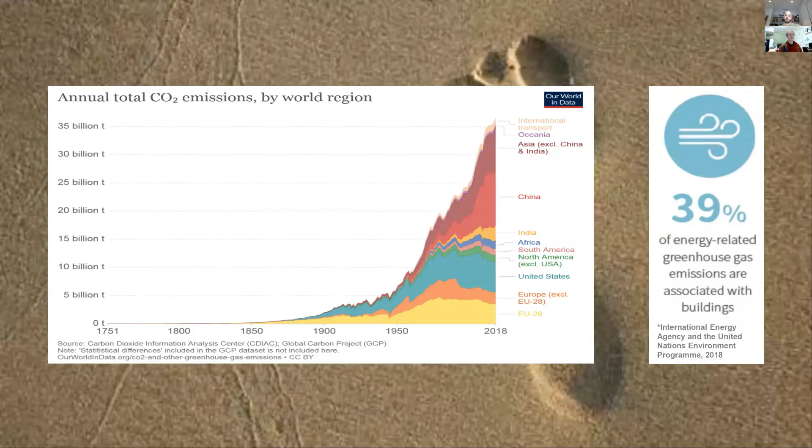Now, each industry needs to create a roadmap to get to a net zero industry. And the building industry actually already has that roadmap ready to go. It's called the Trajectory for Low Energy Buildings. And this tackles operational energy use.

It actually came out in 2019 when the then heads of state under COAG got together and signed it off. And it sort of slipped in a little bit under the radar because it's quite an ambitious document. I know people pushing at the time, they were pushing really hard, but for the wider industry, not all that many people know about this document. It's worth a read. It's only short, but if you read it, you will understand completely why we've got the proposals that we've got into the NCC.

So if we look at the trajectory itself, it actually gives a timeline for the next, well, up to 2028. And it has a number of iterations along that timeline of what's going to happen. But I don't want to go through each one of these things, I'll just go through the very last one. Let me move my thing so I can read my screen.

This shows you where we're heading. We're heading to zero energy and carbon ready buildings. That's residential, commercial, and existing as well is covered under the trajectory. And a zero, I'll read out what it is.

A zero energy and carbon ready building has an energy efficient thermal shell and appliances and has sufficiently low energy use and has the relevant setup so that it's ready to achieve net zero energy and carbon usage if combined with renewable or decarbonised energy systems on-site or off-site. So this is where we're heading. This is the roadmap. This is what the ABCB Building Codes Board is working towards.

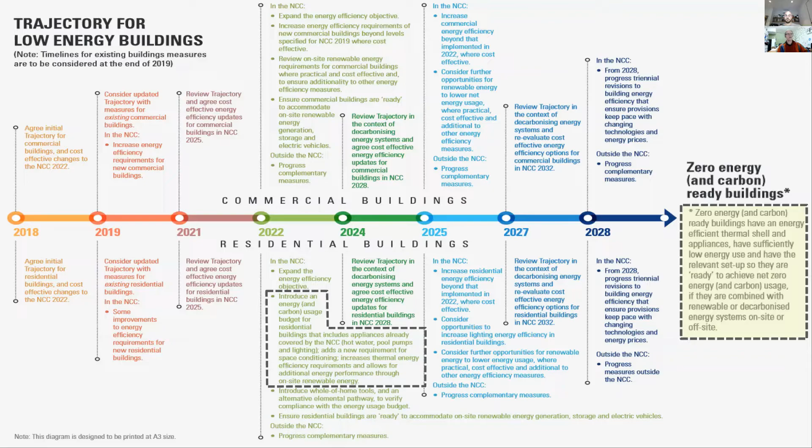This is the proposal under the NCC, and the proposal is to increase the energy efficiency going from 6 stars to 7 stars - that's one part of it. And the other part, the whole of house part, is to start including the major appliances covered under the NCC. So we've got heating and cooling, lighting, pool pumps, hot water, and then on-site energy generation to throw into the mix.

The way this is going to work, you have to get to the 7 stars - that's going to be a minimum for the thermal shell. But within each one of these appliance groups, they will specify a standard appliance. They're calling it a benchmark appliance, reasonably efficient. What you'll need to do is specify an appliance that is at least as efficient as that benchmark. However, you're allowed to trade off a little bit between the different appliance groups. So you can have one that's a lot more efficient in one area, less efficient in another, as long as, on average, when the simulation does its little workings in the background, the whole house is above the benchmark.

The other way you can do it, if you're a bit below, is you can put photovoltaics on the roof to bring it up above that benchmark. And so that's the proposal at the moment.

We don't know exactly what's going to get through in this term's 2022 NCC, nor do we know if there's going to be a transition period. I would say there's going to be at least 12 months, that's my gut feel, if not longer. And if there is a transition period, that's a great opportunity. If you're involved in design, you should be using that transition period to make sure all your designs are starting to get over that bar of 7 stars easily, so you can hit the ground running when it starts.

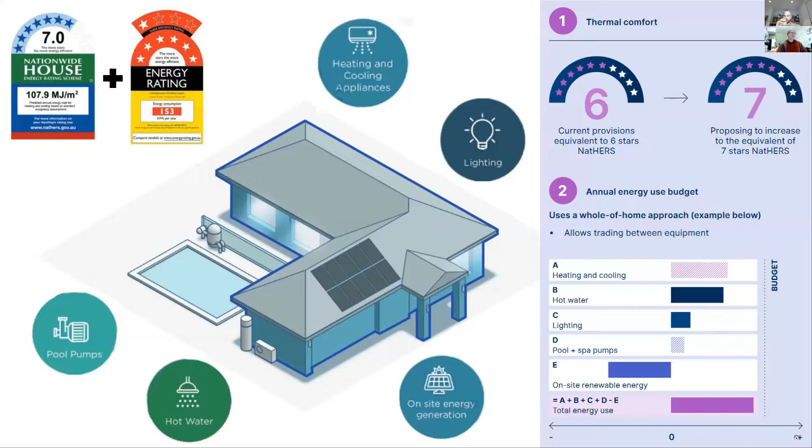This is the First Rate 5 whole of home portal in the cloud. I've run one of my projects through it, so I just wanted to quickly show you what a whole of home software would look like. This takes the thermal performance software, the First Rate 5 file.

So you start by doing a normal energy rating as per normal. At the moment it only interacts with First Rate 5, though I think that will broaden out to all the NatHERS software later on. You get your First Rate 5 file, upload it into the tool, and then you're met with these screens that ask for some more information.

They ask, starting off, for heating appliances and cooling appliances, and what capacity and what energy rating or star rating. You can also look in the specifications and put in COP ratings and a few other ways of entering the data, which the tool tells you.

So that was heating and cooling. We used, in this particular job, efficient reverse cycle air conditioners.

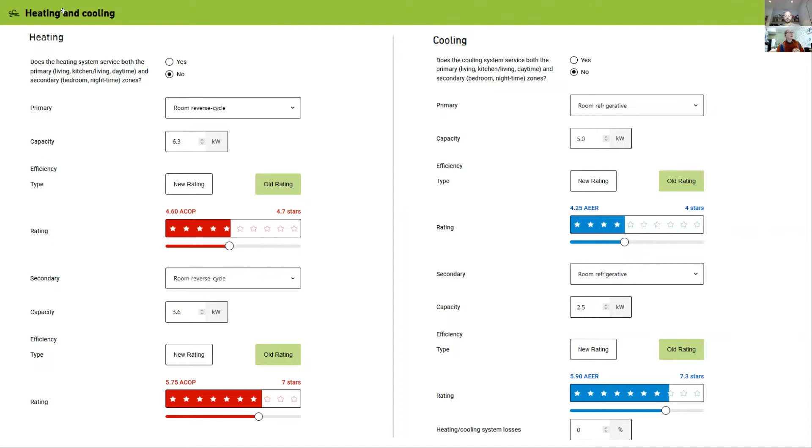Then it also asks about fixed appliances, cooktops and ovens. Now, I should just point out that under the 2022 NCC proposals, cooking is not part of it. However, under the trajectory, it does mention adding other modules later on. So my guess is the other modules likely to be added is cooking, probably pool heating as well as pool pumps. We've got pool pumps in this one, but maybe pool heating down the track, because that uses a lot of power.

And also when car charging becomes a thing and we get more electric cars, my guess is that that will possibly come under this as well.

But at the moment, you can put in cooking in the Sustainability Victoria pilot tool. So I put in an induction cooktop, an oven. This was an all-electric home. For the water heater, heat pump water heating, high efficiency.

For plug-in appliances, you don't get to interact with that. That's things like TVs, computers, anything that plugs in. The software will just assume, depending on the size of the house and the number of bedrooms that comes from the thermal model, a certain plug-in appliance amount.

What you can do though, is put in what your lighting watts per square metre is. That's an easy way to get points - you can call up 3, 4, or 5 watts per square metre. So designers, it might be a good idea to start making sure you have a lighting schedule on your plans if you want the energy rater to be able to input that.

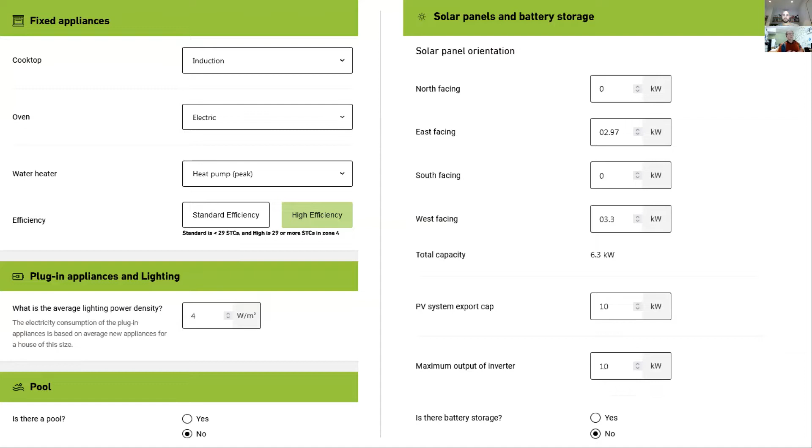Okay, you then press calculate. It does its calculations in the background, and you get a screen a little bit like this. What it shows is the energy production. If you look along the bottom, along that graph, you can see in the column graph each month of the year - we've got two columns. One is the dark green, showing the power being produced by the photovoltaic system. The coloured column is the power being used by the house.

You can see in the centre up the top there, it's 7.2 stars. This was actually on a very tight site, very solar constrained, but we got it to 7.2 stars. Even at 7.2 stars, with just a 6.3 kilowatt system, we're producing a lot more power than the house is using, because it's stocked with very efficient appliances.

Up in the left, you can see a summary. This house draws electricity from the grid, and in doing that creates 3.99 tonnes of carbon dioxide, but it's also putting green electrons out into the grid for neighbours to use. In that sense, it is offsetting 7.27 tonnes of carbon dioxide, for net emissions of -3 tonnes. So basically the grid is 3 tonnes better off from a carbon point of view for having this house on it.

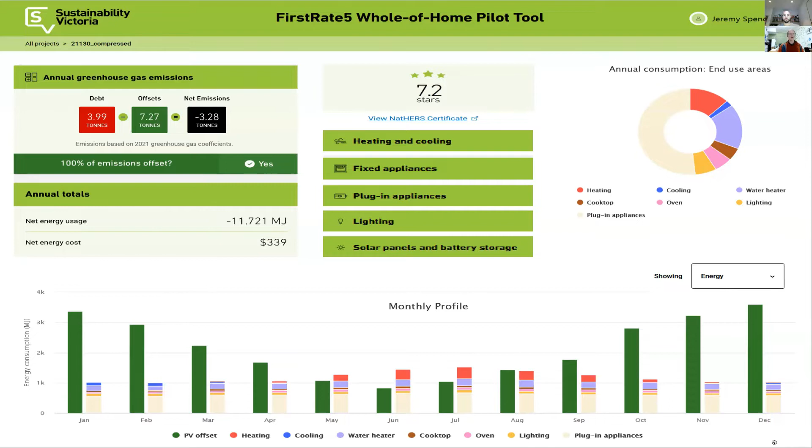The software can also break down the different areas where energy is being used in the house by energy use, emissions, and annual energy costs. So what I can really see with this tool, and the benefit of it, is it will answer the question, first of all, for the homeowner, how much photovoltaics do I need to put on my roof to break even?

That's a pretty useful question. It will also, for the savvy builder, allow a point of sale sustainability upsell. You might say, well, we could put on a high efficiency heat pump hot water system, and show how much you'd save, say it's going to cost $2,000 extra compared to a cheap one, but you're saving $400 a year. You can run those simulations. Or you could ask, should I really go for triple glaze windows? Let's run a thermal simulation with double glaze and triple glaze, put it through the software, see what the difference is. So yeah, it's useful.

The other thing this software does is make sustainability or energy efficiency visible in a way it hasn't been in the past, which is really good. Potentially, project homes could take this and put up a sticker saying this house is predicted to cost X to run, a little bit like when you buy a car. So, useful, good tool.

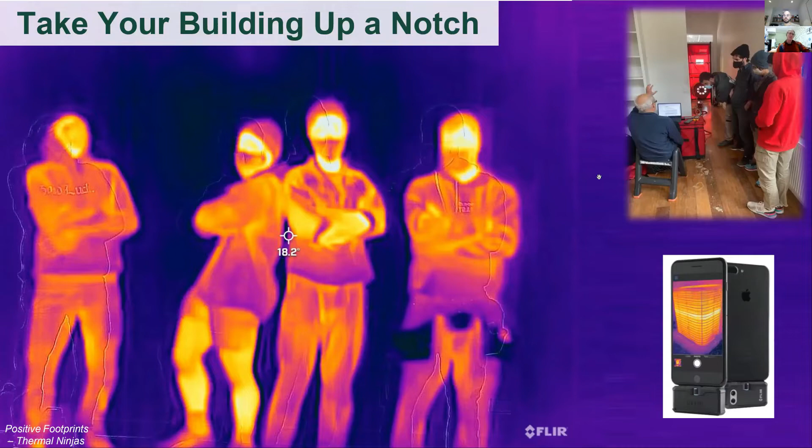So I'd really suggest any builders watching this, if you haven't already, get yourself a blower door test, see how tight your homes are. Get an infrared camera—they're not cheap, but they're definitely worthwhile. A little attachment goes on your phone and straight away you can see how well your insulation's being put in, where you're losing heat, where the issues are. It doesn't take long to upskill a team until you've got a team installing and building so the house performs like it should, like the energy rating says it should on the ground. So that's just a little heads up for the builder.

The heads up for the designer, and for the thermal assessor, is you don't want to be in this position where you've done a design, put it through town planning, done engineering—so much time going, it could be 2 years going through council—and then you go to get a building certificate. They say, get a thermal performance report. You go to the thermal performance assessor, and he hands it back and says this won't get to 7 stars. Because it's too late by that stage.

So now I want to look at using passive solar design to achieve 7-star plus performance. This is the tools and knowledge you need as a designer, and definitely as a thermal performance assessor. Thermal performance assessors should let designers know that change is coming, and designers might want to start, if they're not already getting 7 stars, giving their plans to thermal performance assessors at design stage so they can get early feedback. Thermal performance assessors will need to understand passive design well so they can do improvement reports, listing how a house performs and how it can perform better at that early stage, while the design's still fluid and changes can be made.

For builders as well, this information is foundational at this point in the building industry. All players need to know it, so we're all talking from the same hymn sheet, educating clients in the same way, and builders aren't wasting time costing and designing things that will never get there. So good information for everyone.

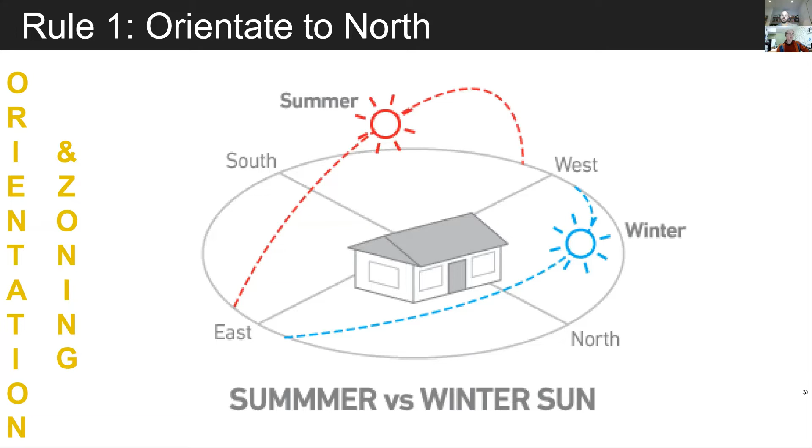I want to show you how I think through the process by taking you through how we think about it in our design team. So we start off by putting the block down. This will be the quintessential passive solar layout, nothing on the north, no overshadowing — it's the perfect conditions. But I'll show you how I think about things.

First I put on the sun diagram, and you'll notice we've got blue and red. The sun doesn't always rise in the east and set in the west. In the depths of winter it rises in the northeast and sets in the northwest. In summer, when the days are longer, it rises in the southeast and sets in the southwest. We can use that fact.

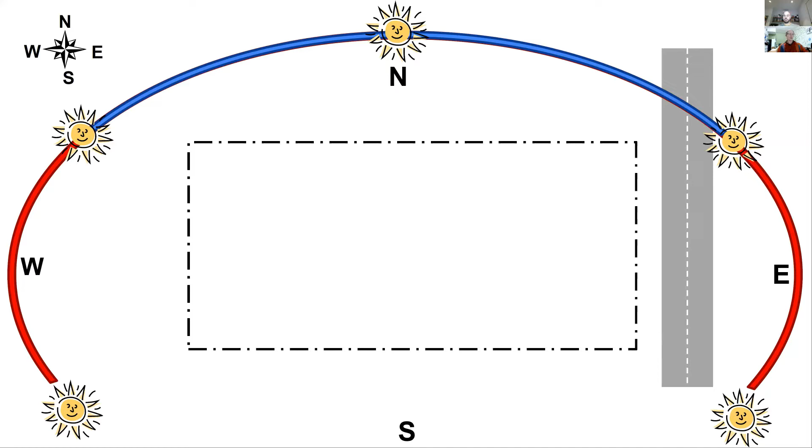The other thing we put on the plans is the prevailing summer breeze. Breezes are really only useful for cooling you down in summer, and they're usually either in the afternoon or early evening — those are the breezes in summer you want to capture. I'll show you later how to find that information if you don't know where to look.

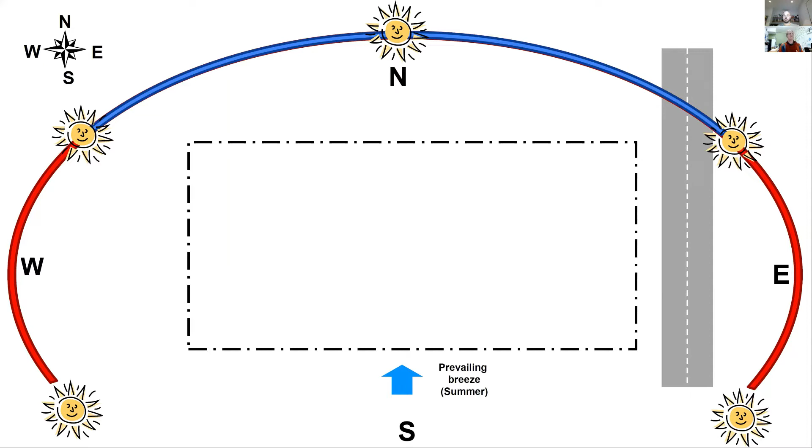I start off by putting the living areas on north. Why the living areas? Because people are in them for many hours during the day, and even once the sun goes down they're in them for many evening hours, maybe going to bed at 10, 11, or 12 o'clock. So they get a lot of use, and we want them to perform well through all that time, so they get priority — put the living areas on the north.

The kitchen I like to link with the living area for that open-plan look, but putting it on the south keeps the sun off the food. It also lets me put windows in the south on the kitchen and windows in the north on the living area, so I can get great breezes blowing across the living spaces where people will be in summer.

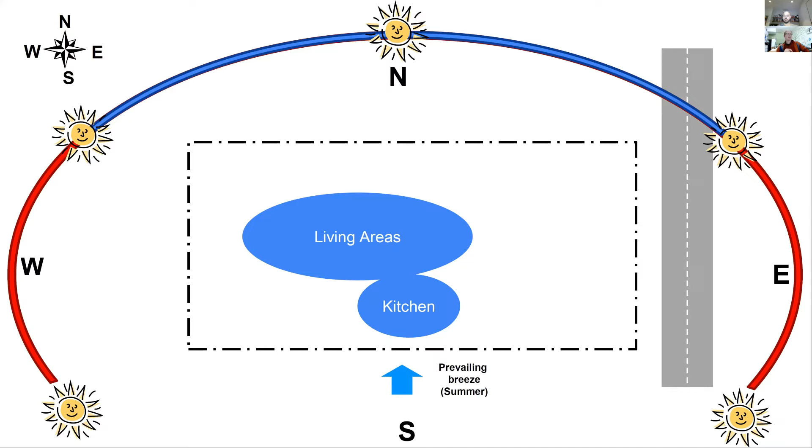Kids' bedrooms I put at the back of the house for a bit of privacy. But the other reason is that the sun sets in the southwest in summer, and that last bit of sun is very low in the sky and very hard to shade out with eaves. So it's not bad to have some building in the way to protect the living area — I think of that kids' area as a thermal buffer from that last burst of energy on a summer's day.

Of course, that's not so nice for the kids' bedrooms themselves, so try not to have the windows too big, and you might think about planting trees in that southwest corner. The master bedroom goes at the front, a common setup, separated from the kids for privacy and to watch the comings and goings. I had one more space on this block to put a north room — this is a single storey one — so we put the master bed there, and the garage goes on the south at the front so the car can come in.

The other reason we put it on the southeast is the sun rises on the southeast in summer, in the morning. Really, you want to delay the house heating up in summer, so it's good that room or garage is used as a bit of a buffer there.

Utilities on the south: laundry, bathrooms and so forth, colder areas that you're not in for very long. That's pretty much the quintessential layout. You can see the rooms on the south almost as buffers or extra insulation for that living area, which gets pride of place.

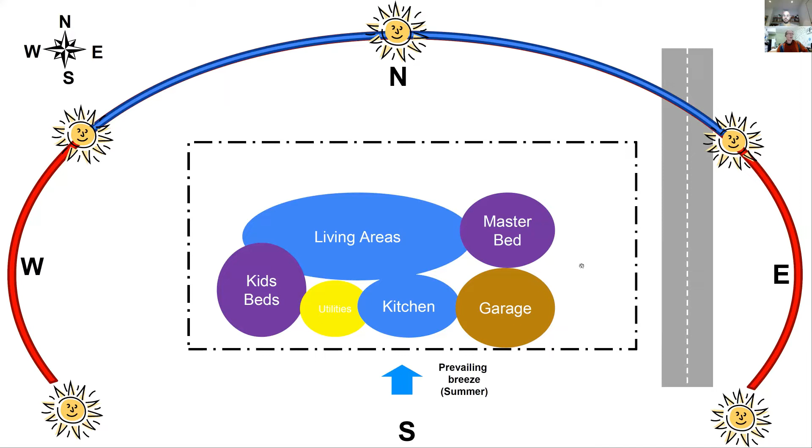And there's a floor plan. This is one of our Carbon Zero floor plans. It's 8 stars, but it's not perfect. You can see that we've put in a courtyard here, but this courtyard wall, as the sun rises in the morning in winter, actually shades the sunlight getting into the living space. But this still gets to 8 stars.

My point here is that you don't have to be perfect. It doesn't have to be a flat side. It would be better thermally if it was flat all the way along on the north, but we want to space things off to give that outdoor deck a nice space and not have it too close to the boundary.

So like I said, we only have to get to B. 7 stars is B. If you want to get to 10 stars, then yes, we have to tick every single rule. But as I present these rules, it's not necessarily to do all of them 100%. If you get most of them most of the way, you'll get to 7 stars. If for one of them you can't get it, you know, you don't have a good orientation to the north, you can only look to the south, well, that will start to raise a bit of a red flag for you. Hey, I better make sure that I nail the other rules that we'll come across.

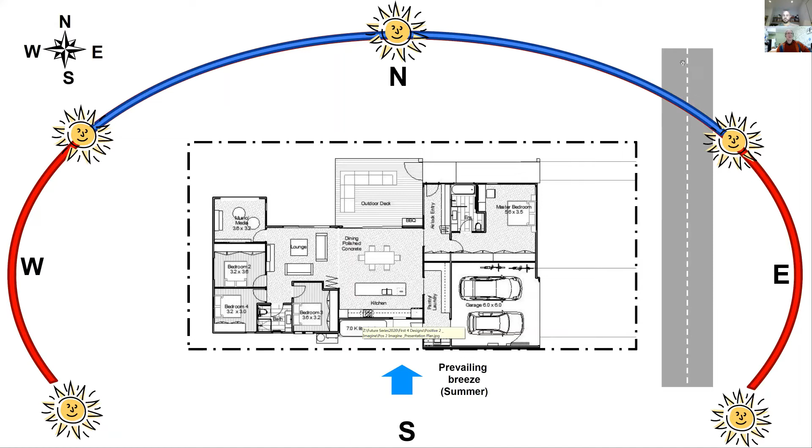So I like to think to myself, this is a thought process that goes through my head when I'm looking at plans, and looking at my plans that my partner Chi Lu does: are my living areas getting north sunlight most of the day in winter? Doesn't have to be all the day, most of the day. If I can answer that with a yes, then I think I'm on the right track. If I can also see other rooms that are also getting north for most of the day in winter, then that's a big tick.

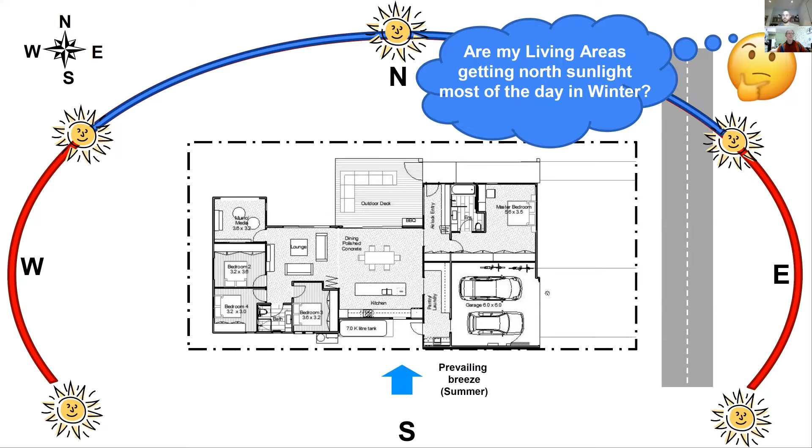The other thing I'll say about this is that the rules I'm showing you are look independent. We just like this particular look, but you could go for any style, as long as you're using the rules. It doesn't have to look like a positive footprint home.

Now, the other rule of thumb, or the other way I think, especially when I'm looking at other people's plans and assessing them, plans that just come across my table, I will ask this question: can I work out which direction is north just by looking at the elevations? These are the plans, a draft set of the plans for that particular house, and you already know that the top one is north. But if you're looking at plans and you think to yourself, oh, that top elevation, that's got to be the north one, right? Now if later on you put on the directions and this wasn't north, if that was south or east or something else, well, again, red flag.

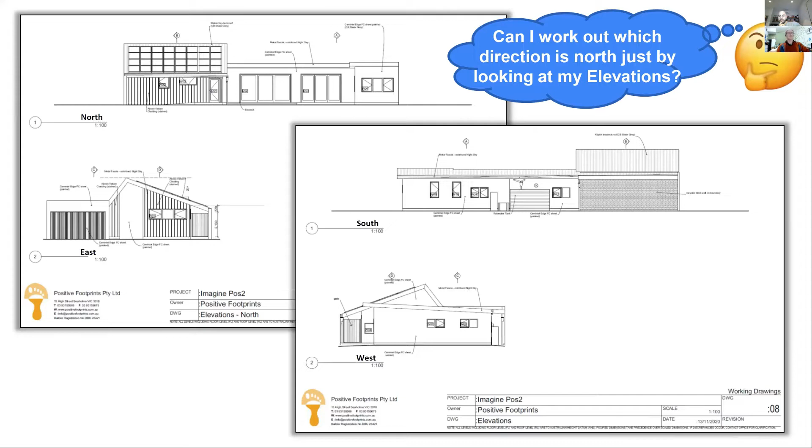All right, so that was the easy scenario, north to the side. That's the easiest. Now I want to show you potentially the hardest direction to get a good score on, and that's north to the street, because theoretically we'd want to put our living spaces close to the street with nice big windows, but most clients don't like that, due to privacy and security issues.

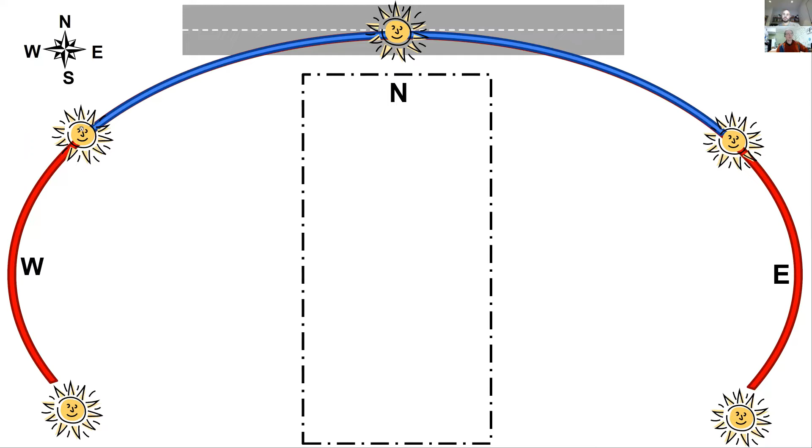I won't go through the whole bubble diagram, but I'll show you a way we solve this in the Carbon Zero series. We introduced a courtyard into this design. The courtyard was set back enough from the front of the dwelling so light could come down over it, and we put the living area at the back facing onto a secluded courtyard, so the owners still get their private open space.

We've also orientated that courtyard to the east, backing it onto the west sun in summer. East is generally a better direction - north is the best, east is second best, generally in the southern colder parts of Australia, because you're trying to heat the home for a lot of the year during winter and the side months. If you can get the house heating up earlier in the day with east windows, that tends to give better temperatures within the house. That's why east can be a better direction than west, even though they receive the same amount of sunlight.

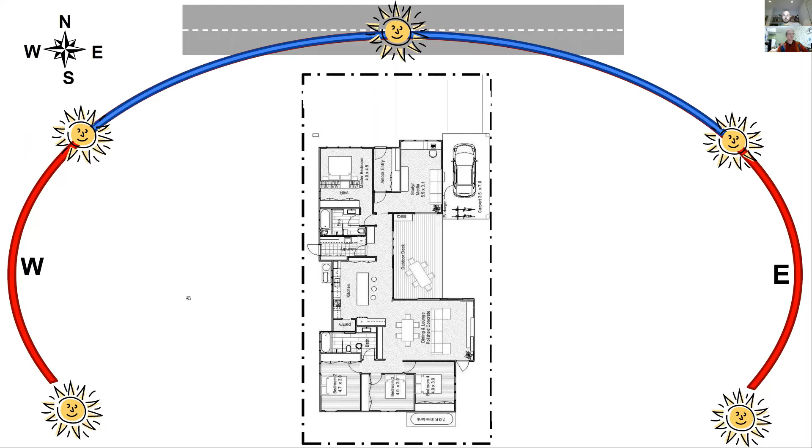From a thermal point of view, if you can minimize your wall area or surface area relative to the volume within the structure, that's less surface area to gain and lose heat from. So it's a bit more efficient to have an efficient shape, and cost efficient as well. So if you do add a courtyard like we've done here, do it for a reason. We did it so we could get these high performance windows in and get sunlight deep into the house, and on balance, it was a benefit for this design.

All right, second rule: let the winter sun in and keep the summer sun out. So now that we've orientated the rooms right, now we're talking about windows and eaves - how much to put in and where.

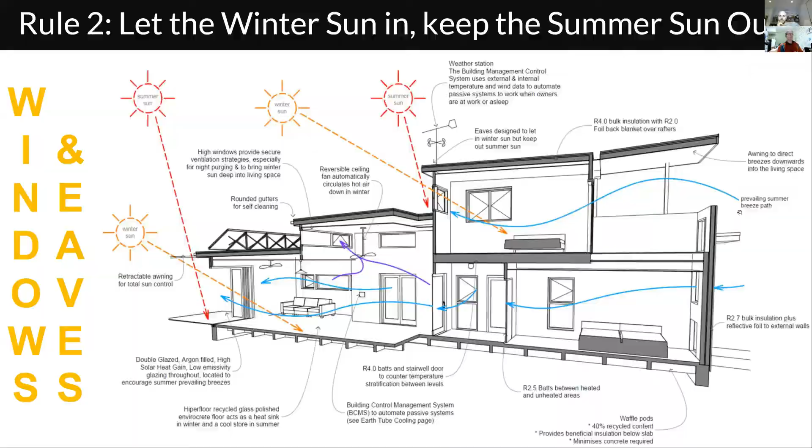Window consideration is crucial to performance. I used to do literally thousands of ratings for other people, and the ones that fail are the ones that have too much glass, and have it in the wrong directions. That's basically one of the biggest red flag issues that fail designs. To give you an idea of how important it is not to go overboard with glass: once you've insulated the house, up to 40% of the home's heating energy can be lost through windows, and up to 87% of the heat is gained through windows.

So windows are very important, but effectively when the sun's not there, they become the thermal holes for the house. To put it in some perspective, these external walls, say in that clerestory area, have 90mm studs with R2.7 batts. We've then got a reflective foil on the outside, a class 4 permeability version, facing onto an air gap, and we've got EcoPly on the outside of this job. So there's maybe half an R rating from the reflective foil onto an air gap, and over that whole wall we're pushing around R3.5 for the wall.

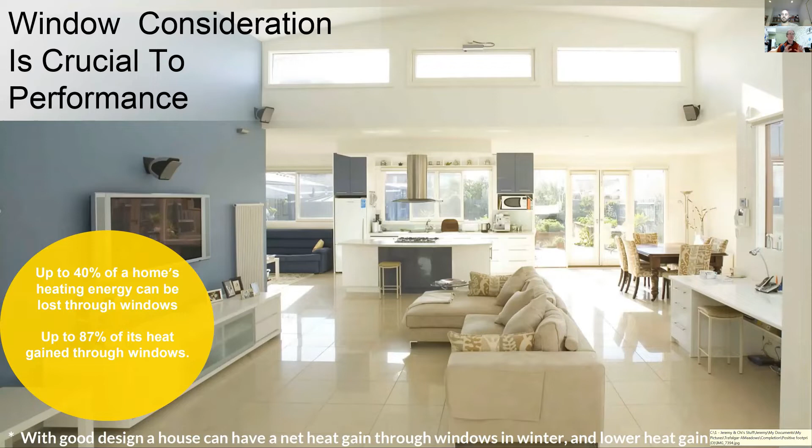The glass, if that was single glazing, those windows would have an R value of about 0.2 - 0.2 versus R3.5, so it's an order of magnitude less. Now these are timber windows, double glazed, low-E coated, argon filled - pretty high performance windows. But even those only get to half an R rating compared to R3.5. So you don't want to go overboard with windows. So how much windows do you want, and where should you place them?

South windows typically are most of the time in shade, losing energy, not getting direct sunlight to make up for it. So typically we'll just be putting in south windows for views, for daylighting into the rooms, and also to pull in breezes if the breeze path is going that direction.

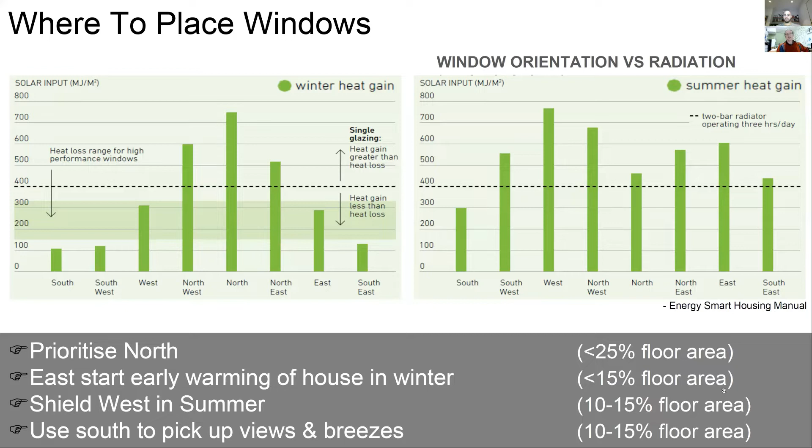Now that's getting a little technical, trying to work out all these different rooms and percentages of glass, so I like to just use this rule of thumb: I add up the whole house, say it's a 200 square meter home, look at all the windows, add them up, and just want to see whether I've got a ratio of 25% or less, and then I'm golden. So if I had 50 square meters of window in a 200 square meter house, that's pretty good.

If it's going up above that, like I show down the bottom, it says high performance windows and mass, less than 30% is probably okay. But if I'm going above that, then I might really want to say to clients, I think this is going a little bit high. I'm concerned that the house is not going to perform very well. I'm concerned that you're going to be uncomfortable. Let's send it off to a thermal performance assessor to have a look at it.

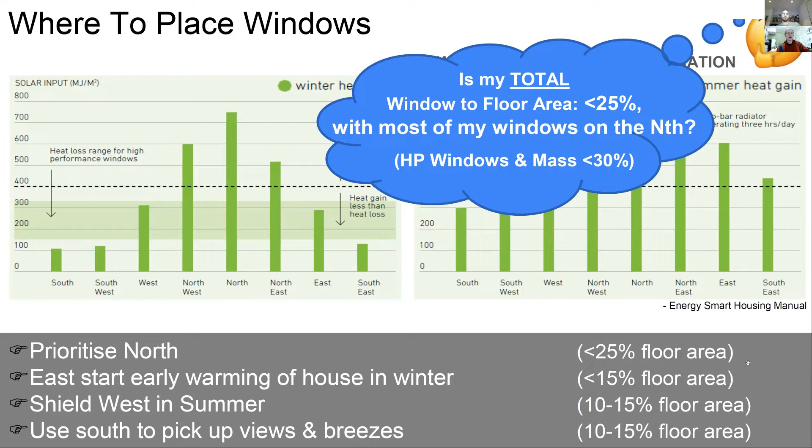I am a thermal performance assessor, so I would look at it. But for other designers and builders, that might be what you want to do if you're getting high square meter percentages of glass. All right, so that's basically how to lay out your glass: most in the north, a little bit to the east, less to the south and the west, and don't go over that 25% amount for total.

Okay, how to choose windows for performance. There are 3 numbers that builders need to know, and designers and thermal performance assessors need to know about windows. One is the U value, one's the solar heat gain coefficient, and the other one is the air leakage. Now, I've done some posts on these, and if people don't follow the Builders Declare Instagram or Facebook, they probably should. I try and put out some useful information every now and again.

I've hit 2 of those numbers. I haven't hit air leakage. That'll be coming up. Let me start with U value, because that is probably the most important. Now, U value is a measure of how much heat gets conducted through the window. And remember, we don't want a lot of heat to be conducted through those windows.

This is not talking about how much sunlight gets through. This is about, if you've got a different temperature on either side, how much heat flow do you get across the window. We want our windows to be good insulators. Now, a U value is a measure of how well something conducts. So we want a low U value. We don't want a high one which says it conducts well. We want a low U value.

And when you're talking about U values, it can get a little bit confusing, because Australian windows are rated and tested under AFRC certification, Australian Fenestration Rating Council certification. And they will be testing the whole of the window. However, the U value of the window is made up of the U value of the glass, the U value of the frame, the U value of the spacer if there's double glazing going on. All those things add together to a U value for a window. So just make sure that if you're ever comparing things, it is the U value for the whole window.

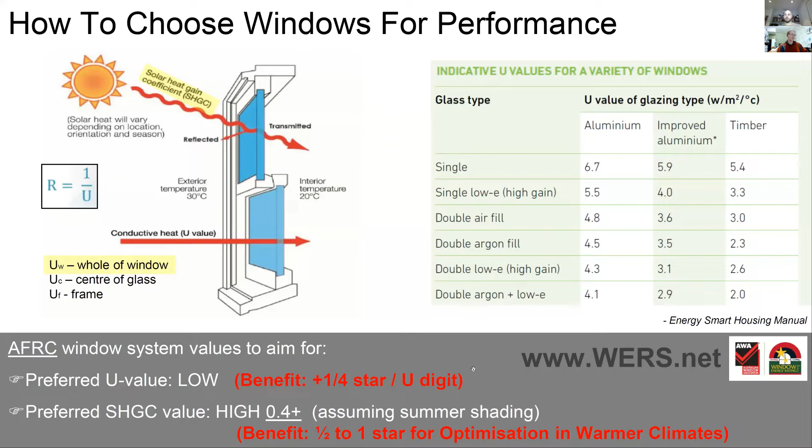Find a window that meets your criteria, and then start checking the air leakage rates, which will also be in that database. All right, how to size northern eaves. So east, you can't really size with an eave because the sun rises and is very low, and you just can't make an eave long enough to shade out the sun as it rises. Likewise, when the sun's setting, it's very hard to create an eave that will shade out the setting sun without also shading out the rest of the year.

However, you can do so on the north because the Earth is on a tilt as it goes around the sun. The sun itself, as it travels east to west, is higher in the sky in summer, lower in the sky in winter. There's a rule of thumb that works really well for Southern Australia, pretty much up to Brisbane or so. This rule of thumb will work well.

You can, of course, go better than this rule of thumb by modeling it in your software, and also when you get your thermal performance assessor to do an optimization rating at design concept stage, you could ask them about maybe playing with the eaves a little bit and seeing what it does. Some rooms are just a little bit cold, so it makes sense to pull them back a little bit from the ideal, or to put them out a little bit if they're overheating.

However, what is the rule of thumb? This will put you in the right ballpark, and this is also something that a builder can check if you're just looking at plans. It's called the 45% rule, and it goes a little something like this: you just measure the distance from the sill to the underside of the eave.

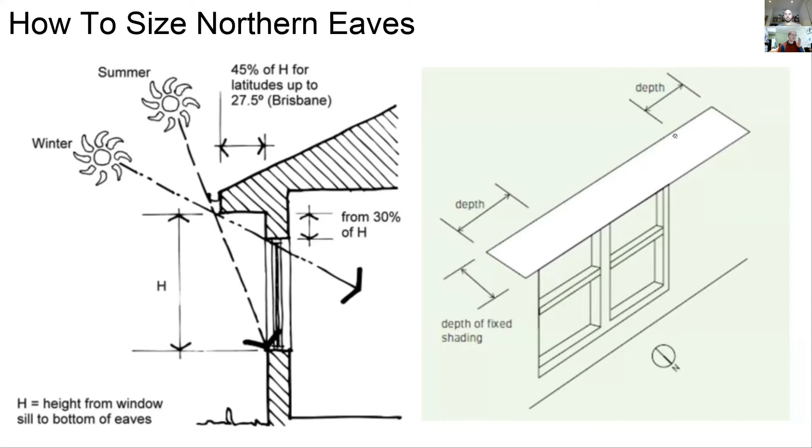When I'm looking at plans, I like to pretend that I am actually the sun, and I ask myself these questions. In winter in Melbourne, I'm at 30 degrees. If I'm rising in the east and setting in the west, can I see into all my windows? Can I see into the living areas for most of the day? That's what I'm asking myself.

Then I'm imagining myself in summer. Summer, we're around about 75 degrees in Melbourne. So I'm rising in the east, getting higher in the sky. Am I shaded out, especially at midday when it's getting really hot? Are the eaves shading everything out, and then I'm setting again? So just pretend you're the elements and look at your elevations with that thought in mind.

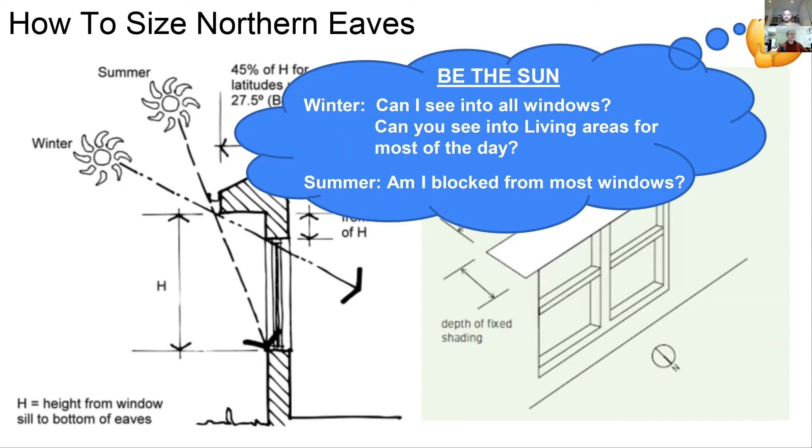All right, so that's the second rule, and probably the most complex rule of them all, about how to place windows, how to size windows, and how to choose good performing windows, and how to shade out the summer sun, at least on the north where you put most of your windows.

Rule 3 is keep the heat in and keep the heat out. So here we're talking about insulation, and insulation is actually really straightforward. What's hard is the installation of the insulation and getting that right. And that is something that builders declare bang on about a lot, which I've done talk about that I'll show you in a minute. I'm not going to go into it too much today, just a couple of points.

The first thing is, for insulation to be effective, it needs to be complete. One thing I'm showing here is, if you don't already do it, you should make sure that whatever you're putting on your external walls for insulation also runs around the internal walls of the garage. Garages are notoriously leaky because of the garage doors, so treat them as outdoor spaces. And if you've got rooms above the garage, make sure you're insulating them as though they were an outdoor space.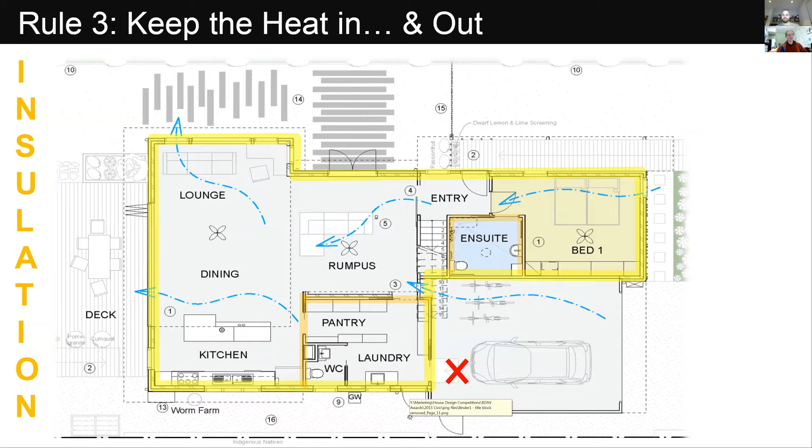And don't do what I did on this particular design and put a sliding door into the garage space. They're very air leaky. It's really hard to seal a sliding door. So that was a silly idea.

All right, what are the rules with bulk insulation and how much? Maybe I'll start with how much. This is a suggested starting point because, of course, the more insulation you can put in, the better. Sort of like water tanks - how big should my water tank be? Well, the bigger, the better. Then it can catch that downpour, right?

However, we have space constraints. We also have monetary constraints. And you need to realize that there is a diminishing return on insulation thickness. So you get a lot of bang for your buck for your first R1 of insulation. You might get half that for the next R1, half that again for the next R1. So it's not the same benefit each time you get it.

What I've got over here are just some general provisions. This is what we use: R4 for the roof, R2.5 for the walls. We might push that to R2.7, but that's a bit more expensive. But we often do go to R2.7 - will also fit into a 90mm cavity. And underfloor, if we've got a subfloor, we'll go with R2.5.

Now, using that, we might put a reflective foil blanket over the top, so total roof might be pushing more of an R6. But we use that specification whether it's 7 stars, 8 stars, or 9 stars - it's all the same specification. It's not a matter that you need to upgrade and keep increasing the insulation. No, you've got to work with these other tools and get the design right.

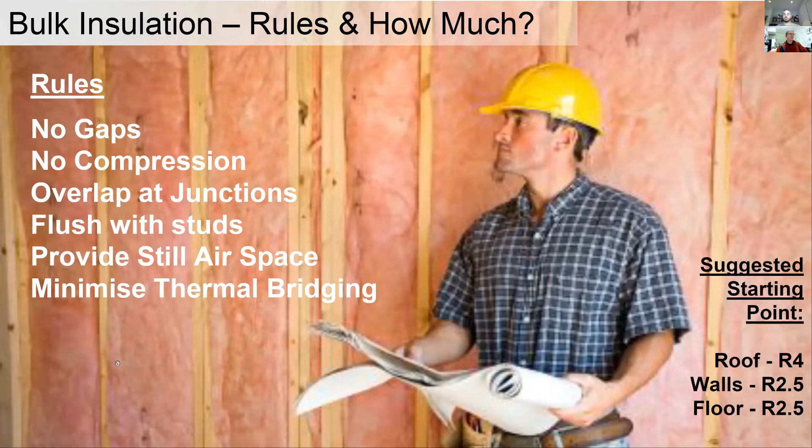Just a little note for myself: have I checked the thermal bridging on my structure? I always ask this question when I get my engineering - is there steel going from the inside to the outside? Check the working drawings. If I've got a slab with a high freeboard on the side, once that gets over about 200 mil of exposed slab edge...

Do I know how to build tight? That's a question you should be asking yourself, because standard batt insulation does not stop air infiltration. You need to know how to do membranes well on the outside of your house to make that nice and tight. And on the inside, if you're going the passive house route, how to do membranes. If you're going standard construction, at least try to minimize air leakage by working with your plaster to make that the tight element on the inside of the house, with a lot of caulking and sealing of penetrations.

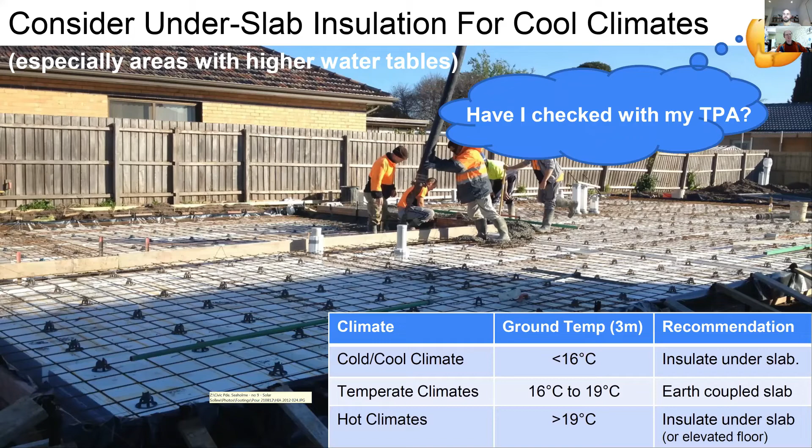All right, let's get into this, the 4th rule. So that's keep the heat in, keep the heat out, do your insulation well, build tight.

The next rule is thermal mass: store the warmth in winter and keep the cool in summer. The way I like to think about thermal mass, and sunlight coming in and going onto the thermal mass, is a little bit like a glass and water coming in.

Now, if I've got a lightweight home, I've got my glass, I've got my sunlight coming through the windows because I've put my windows on the north, done the right sort of set out, sun streaming in in winter - what will happen is the house will heat up, or that glass will fill up, and it'll get to a certain level where the water overflows and you can't store any more heat. And once the sun goes down, that water will start to drain out of the glass. There's only so much in there.

Now, putting in thermal mass is a bit like changing that glass into a bucket, or changing that bucket into a bathtub, or changing that bathtub into a pool, for instance. So thermal mass can be your friend if you've got northern sunlight coming in.

There's two ways that mass works. First of all, mass works if you've got a big change in temperature throughout the day, what they call a large diurnal temperature range. If you've got a large temperature range over the day, on average you'll find if you put a bit of mass in the house, it takes a bit to heat the house up.

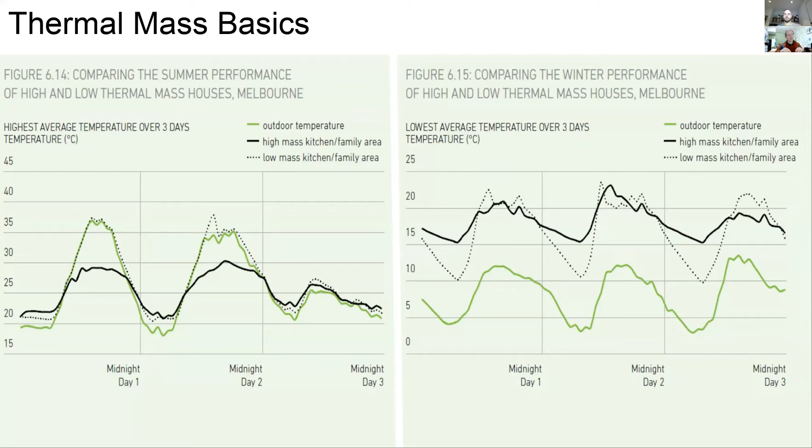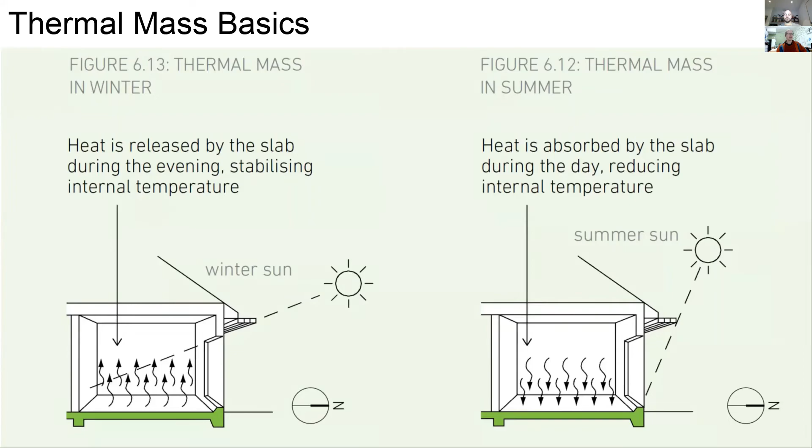How much internal mass and where is often the question I get. So like I said, you don't necessarily need any to get to 7 stars, but if you want to get there a little bit easier, a slab on ground tends to be the most cost-effective way to spread mass evenly throughout the house.

But if you're going to do this strategy, I would definitely say that you should be checking with TPA, because you want to make sure it's cost effective, that you're getting bang for your buck, and it's making sense for you.

Here we've chosen recycled brick, so very low in embodied carbon. Obviously, the mortar is cement-replaced mortar. The concrete is 60% cement replaced with fly ash. At the moment, I'm doing a series—in fact, if you check out our Instagram or Facebook, I'm doing a series called the Embodied Carbon series, looking at a lot of different strategies to really lower the embodied carbon in a home. But anyway, just keep that in mind and check with a TPA before adding it to internal walls.

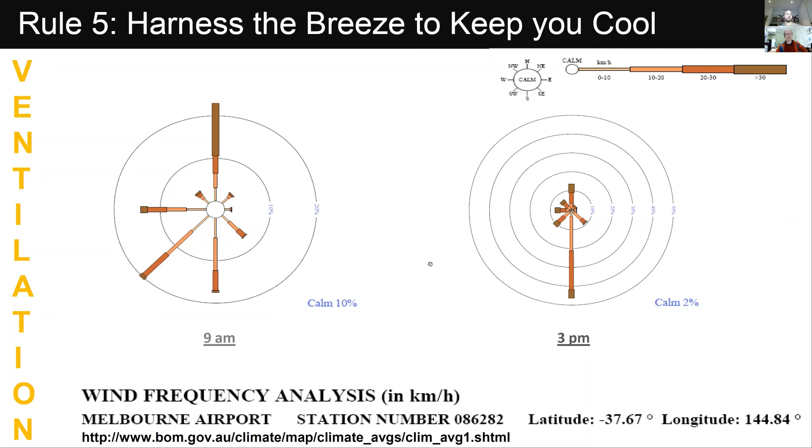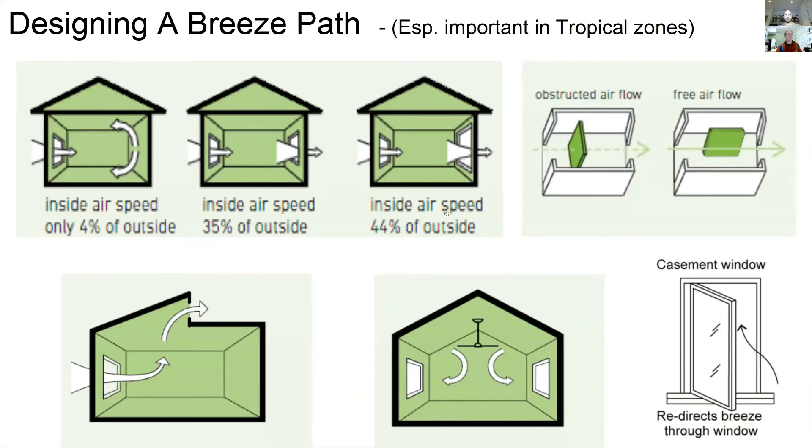Casement windows can be really useful if they open out. If you hinge them to the prevailing summer breeze, they will scoop it in if it's going down the side of the house. So windows on the side of the house, hinge them towards prevailing summer breezes.

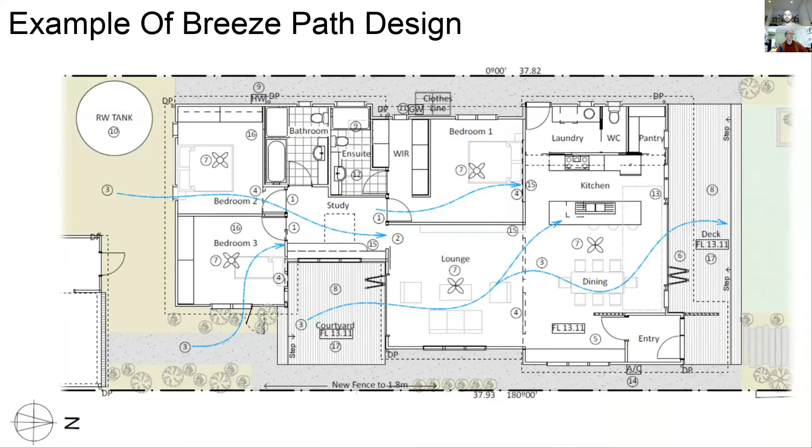There's a schematic showing breeze paths through a house we did, showing how it can blow over the living spaces in summer, which is primarily where people are hanging out, where you'd like, when the wind's just right, you can open the doors and let that blow through. There's the same house in 3D.

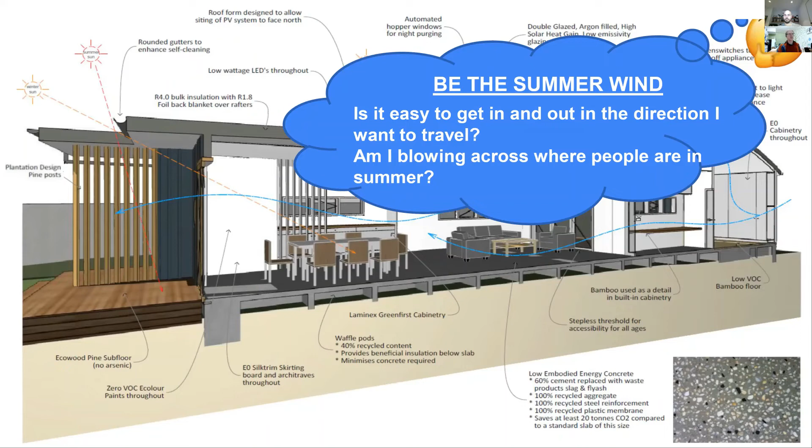And once again, just like I like to be the sun when I'm looking at my elevations, I like to be the wind when I'm looking at my floor plans and elevations. And I just ask myself this question: is it easy to get in and out in the direction that I want to travel in summer? And am I blowing across where people are going to be? Simple questions.

And of course, don't forget, ceiling fans are still a very energy efficient way of moving air and giving you a cooling feeling as it blows air across your skin and evaporates moisture off your skin. You get a 3-degree cooling effect.

All right, that is the rules. You are now all masters at passive solar design. If you take in what I've said, you should find that your designs will sit within that 7+ ballpark if you're meeting most of those rules that I just went through. You don't need to calculate it, because that's what the NatHERS tool does. You just need to know the logic of it as you're laying things out.

Now, I would still say, though, that it's super valuable—this is my very last point—super valuable to use NatHERS as it was designed, and that is as a design tool. It's become a compliance tool for the industry, but when it was first designed, it was there for designers to improve their plans, or at least that was one of its focuses.

And I find, even though Chi, who designs for us, knows passive solar design like the back of her hand, she'll do a great design. She'll pass it to me, even though she's been doing it for almost 20 years, and I can get that design and go round the house.

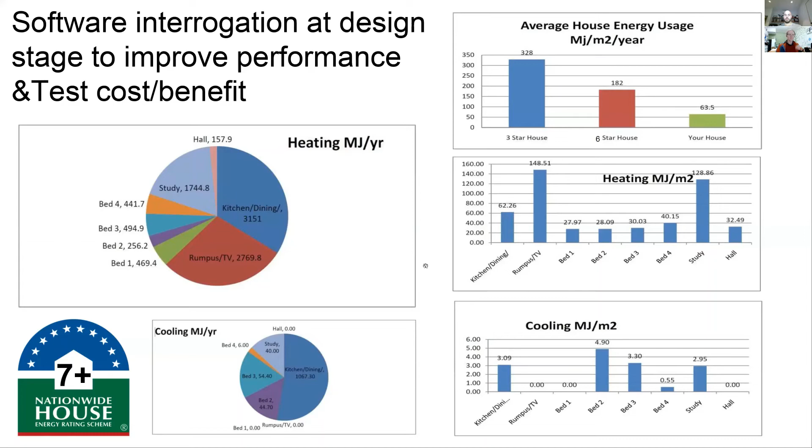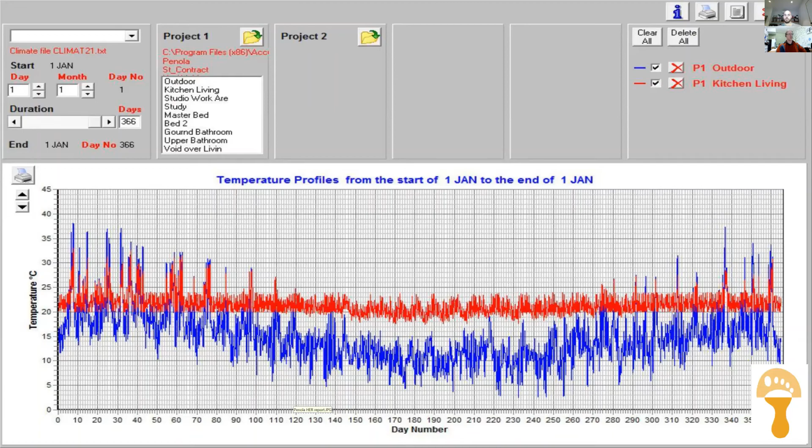Even if it starts dropping down a little bit in winter, the technology we've got these days can make up for that. So it's still a very worthwhile process to do, and it will definitely get you into the high star ratings if you do that. So we've arrived at the end.

High performance living. Well, not quite, of course. We know it depends on the build quality, as I mentioned before. What we've done is really just got to this 7 stars, or 8, 9, 10 stars, but we've only really affected this space conditioning wedge. There are lots of other wedges to go, and that's where whole of home is really important.

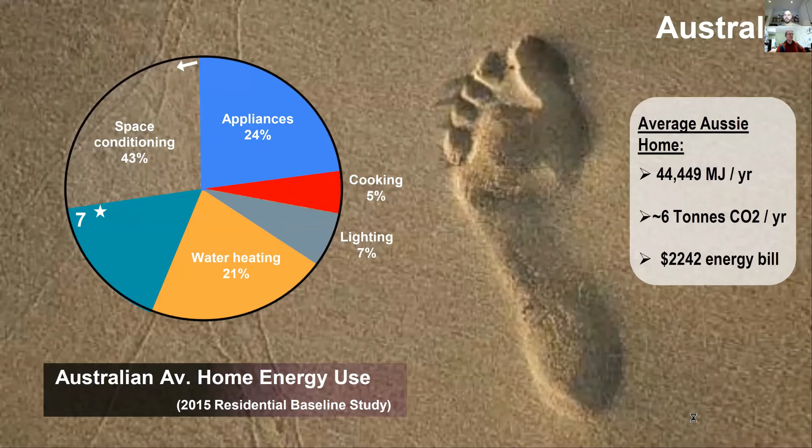Unfortunately I don't have time to go through how to minimize each of those wedges. Good news is I've already done a talk on it. It's maybe a little bit dated now, but it'll give you all the information you need to know.

Perhaps when the rules come out of what's actually going to go into whole of home, we'll bring up an updated version of that. But this will definitely put you in the right ballpark of how to minimize and choose appliances to minimize the energy loads in each of those other wedges, and also how much solar panels you'd need to put on the roof to break even. Of course, the new whole of home tools will help you calculate that as well.

And very last, and slightly cheesy slide: climate change is here now, but so are we. As you saw before from that graph, 39% of the carbon dioxide is related to the building industry, but that gives us the opportunity to roll up our sleeves and really make a disproportionate impact on flattening the carbon curve. So climate change is here, but so are you, and you can make a difference.

The way that you proceed with your business will make a big difference. This is a challenge for humanity. Let's get on board. All right Mike, that's my last push there, back to you.

Thank you, Jeremy. That was incredibly detailed and thorough, and I think the way you broke that up into five different major areas was quite clever and quite easy to digest. So thank you. That was really informative — even as a sustainable builder myself, I got a lot out of that.